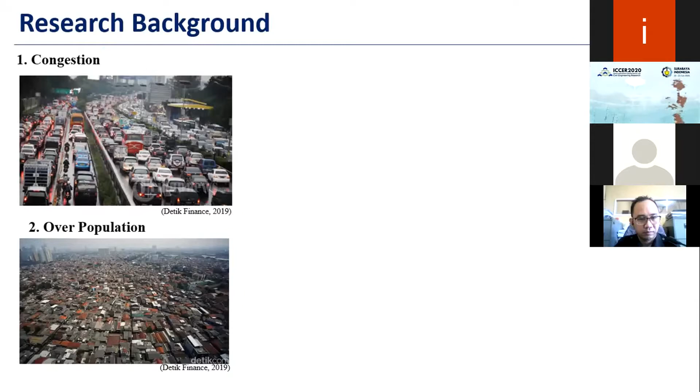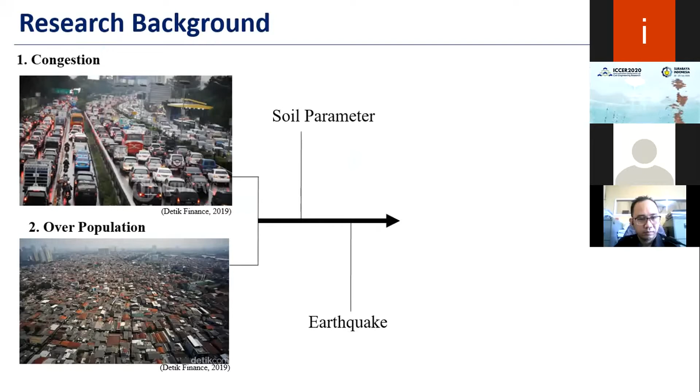First, research background. Jakarta is a large capital city in Indonesia with a population of more than 10 million. Many problems occur there, one of which is congestion from the very large population, so rail-based public transportation is needed to reduce congestion. Taking into account the soil parameters and earthquake load, utilizing the basement by building underground tunnels is a direct solution for reducing congestion in Jakarta. So tunnel infrastructure is the best solution to break down the congestion in Jakarta.

This is my research purposes. First, knowing the tunnel's ability to withstand axial force, bending moment, and oval deformation that work under static conditions. Second, knowing the tunnel's ability to withstand the maximum earthquake load received by the tunnel structure.

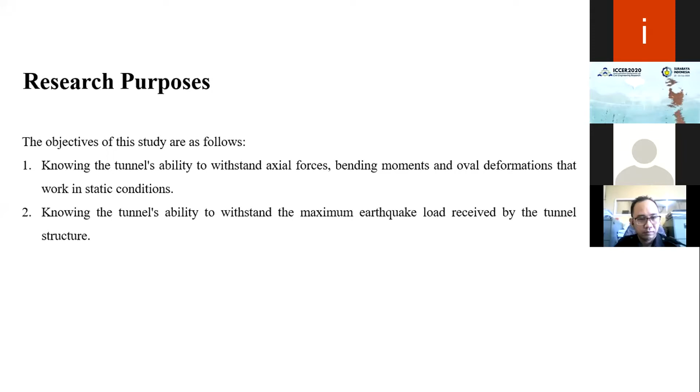Second, why is the Jakarta MRT tunnel circular? There are various kinds of tunnel shapes, one of them being a circle. Considering the soft ground in Jakarta, a circular tunnel is the right choice to reduce stress, because for tunnels that have angles, the stress that occurs will be higher than in a circular tunnel.

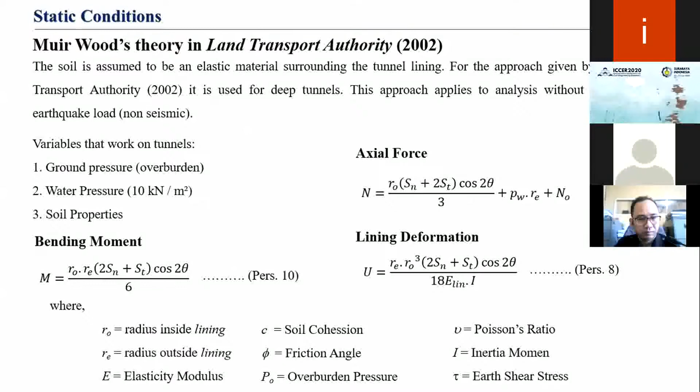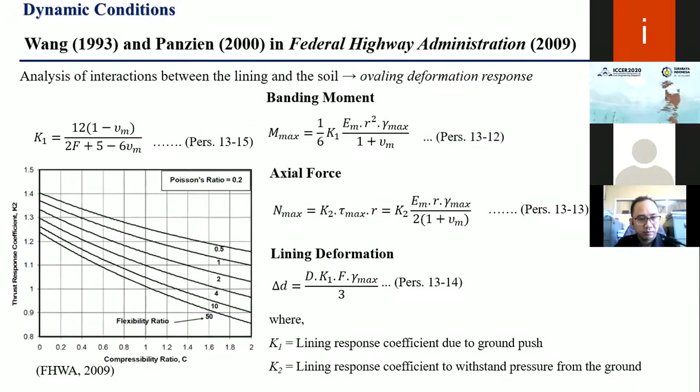For static condition, I use the reference from Muir Wood's theory, considering three variables: overburden, water pressure, and soil properties, which produce bending moment, axial force, and lining deformation. For dynamic condition, I use Wang 1993 and Panzien 2000 from the Federal Highway Administration, which produce the circular lining behavior: bending moment, axial force, and lining deformation.

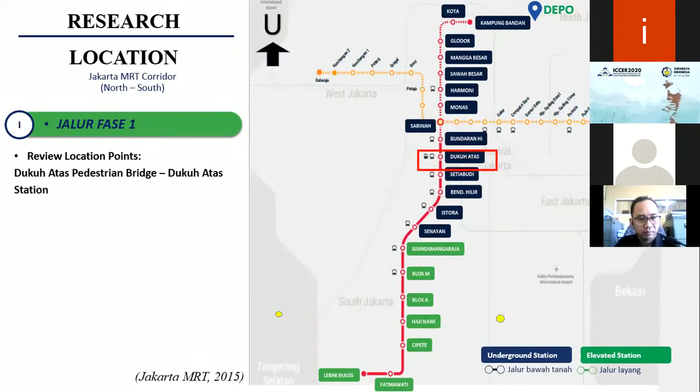Third, research methods. The research location is between Dukuh Atas Pedestrian Bridge and Dukuh Atas Station. The research data I got from secondary data of PT Wijaya Karya and PT MRT Jakarta, and for primary data I took documentation. The data I use is BR21 Borelog data, which is dominated by clay and silt.

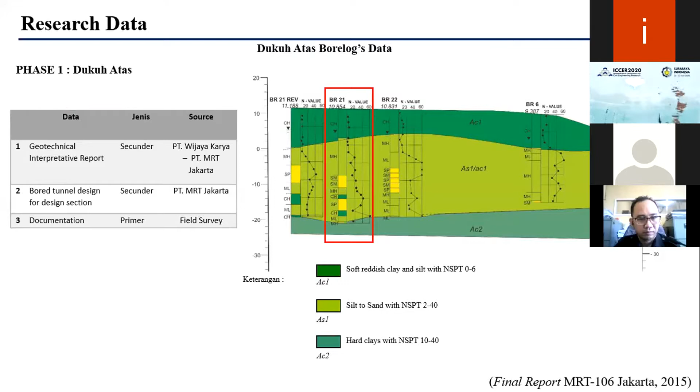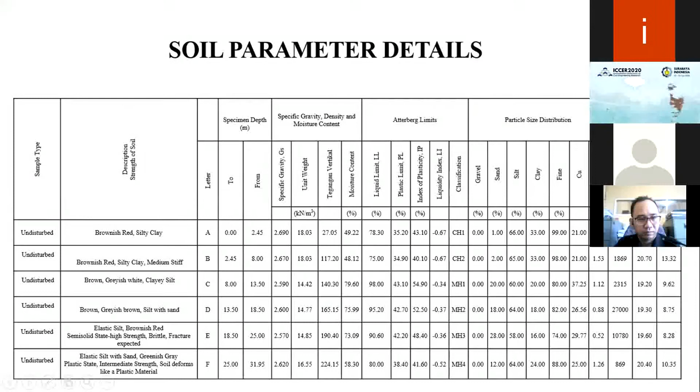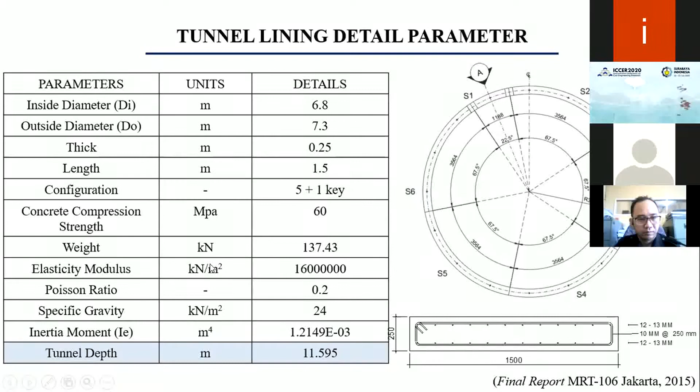This is the tunnel lining detail parameter. We have an outside diameter of 7.3 meters and inside diameter of 6.8 meters, with a grouting thickness of 0.25 meters on the left and right sides, and tunnel depth of 11.5 meters from ground level.

This is the application of earthquake load parameters. I use the South Sumatra earthquake 2007, including the PGA number from the US Geological Survey 2012. The South Sumatra earthquake has a peak ground acceleration of around 36.8 centimeters per second squared and a moment magnitude of 8.4 on the Richter scale.

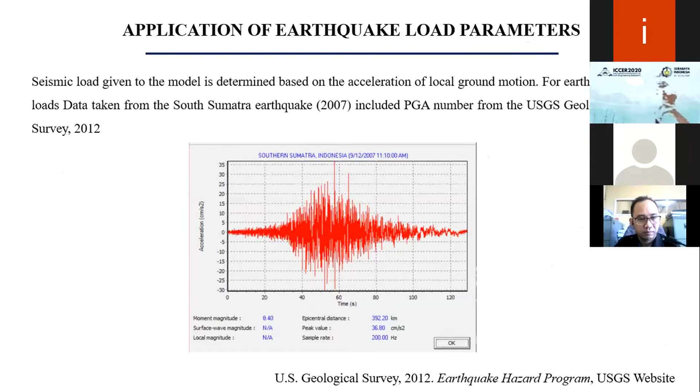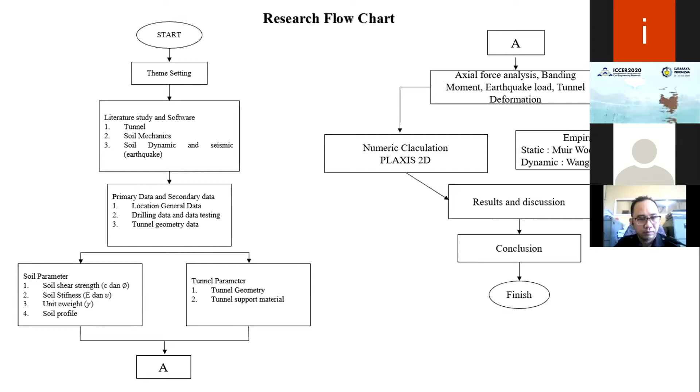This is the research flowchart. Firstly, theme setting, literature study and software, primary data and secondary data, divided into soil parameter and tunnel parameter. Then I calculate axial force analysis, bending moment, earthquake load, tunnel deformation, divided into numerical calculation using Plaxis 2D and empirical calculation using static and dynamic methods, Muir Wood and LTA, and Wang and Penzien 2000.

Result and discussion. This is our empirical method step matrix. Firstly, manual calculation divided into static condition and dynamic condition.

Location, Dukuh Atas pedestrian bridge until Dukuh Atas station.

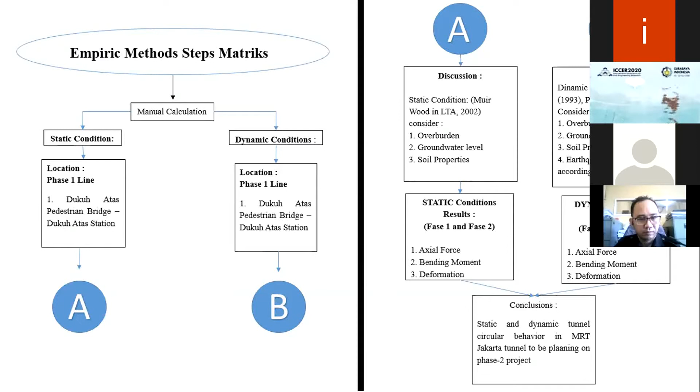The discussion on static condition has considered the overburden, the three variables: overburden, groundwater level, and soil properties. Also in dynamic condition, consider four variables adding the earthquake load PGA according to PGA allocation, which produces the circular lining behavior, that is axial force, bending moment, and deformation.

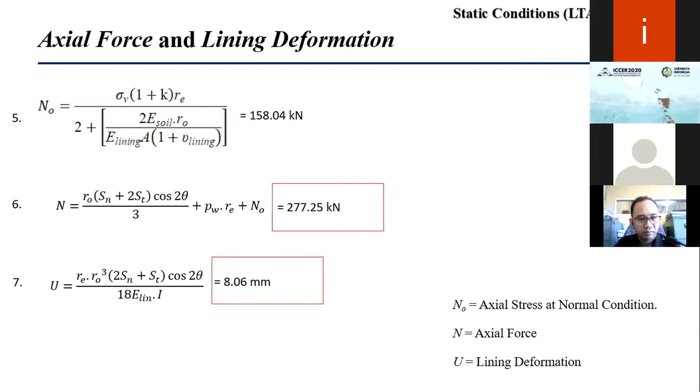The result: this is bending moment based on static condition LTA 2002. We can see the bending moment is equal to 71.39 kN per meter, and axial force and lining deformation shows 8.06 millimeter. That is still in the safety zone of tunnel deformation.

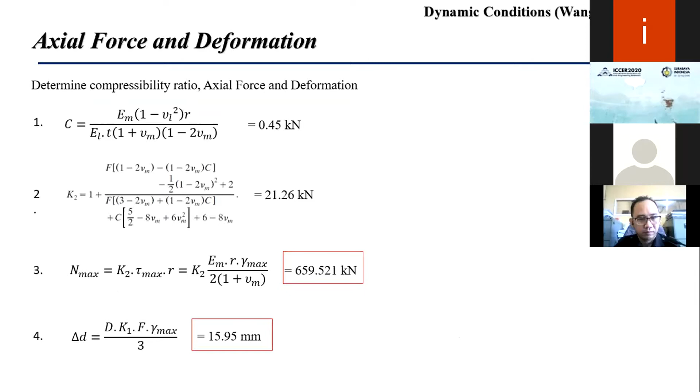And then in the condition based on Wang 1993, we can see the deformation 15.95 millimeter. And then bending moment and deformation based on Penzien 2000 has the same value, and the bending moment is equal to 44.91 kN per meter.

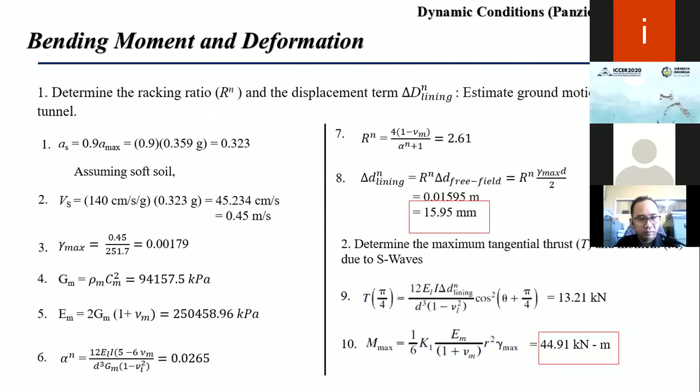I put 3 input stages: first surcharge load, second excavation, and third earthquake load. And this is the static final result.

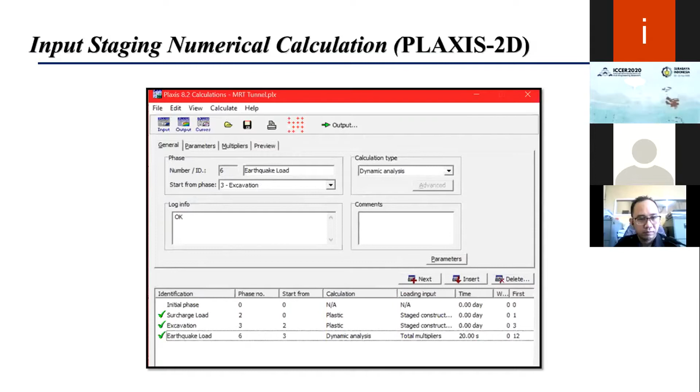We can see the comparison between empiric and numeric. The numeric shown circular lining behavior is bigger than empiric calculation. The lining deformation of empiric calculation equal to 8.06 millimeter, and numeric equal to 15.12 millimeter. That is still in the safety zone lining deformation.

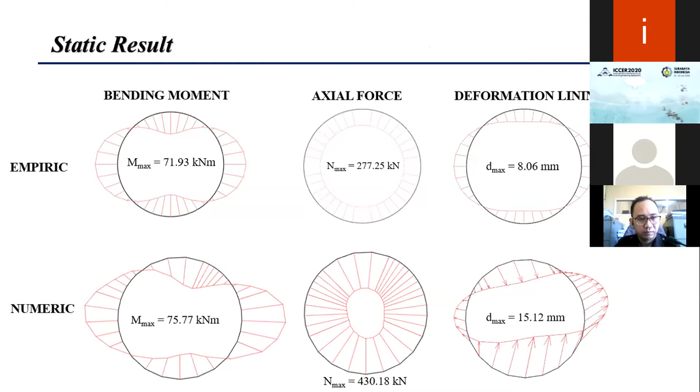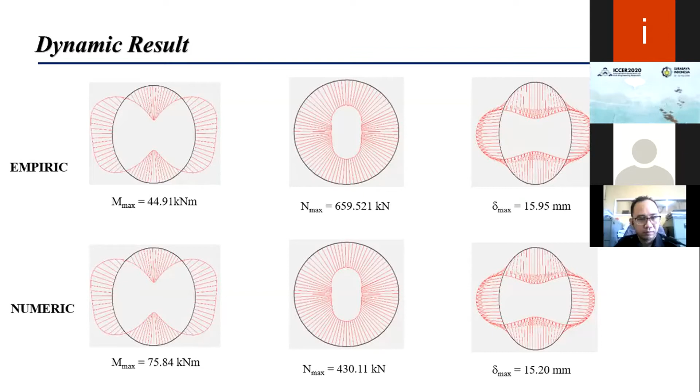The circular lining behavior shows the compression falling for the tunnel. The dynamic tunnel result from empiric and numeric is not different enough. Both deformations show equal to 15 millimeters.

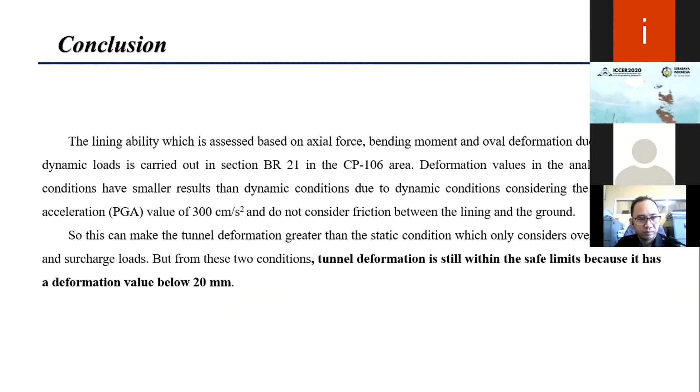This is the conclusion. The lining ability, which is assessed based on axial force, bending moment, and deformation due to static and dynamic load, is carried out in section BR21 in the CP106 area. This can make the tunnel deformation greater than the static condition, which only considers overburden load and surcharge load. But from these two conditions, the important thing is tunnel deformation is still within the safe limit because it has a deformation value below 20 millimeters.

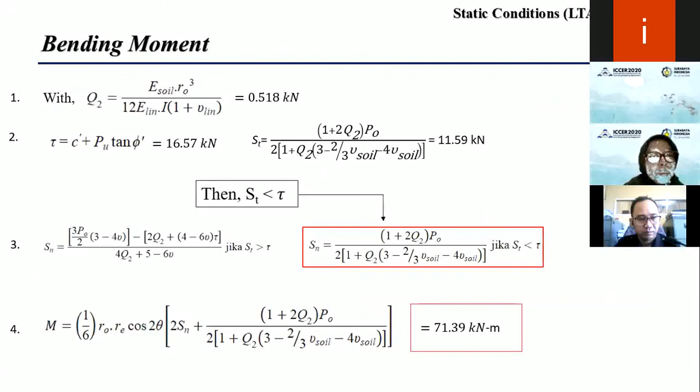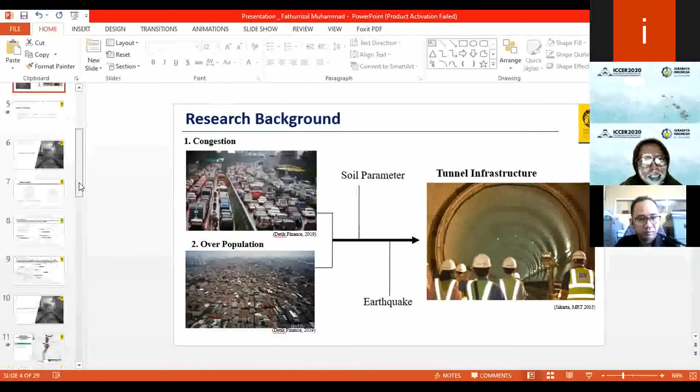Okay, Mr. Fatur, may I ask you something? Can you explain to me, if you calculate with a pseudostatic analysis, is the result the same as your result?

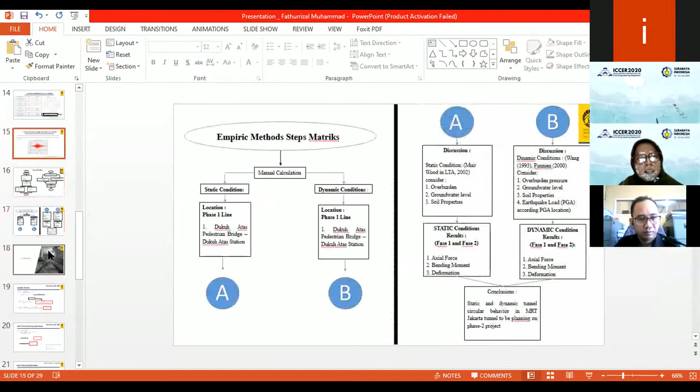Okay, in pseudostatic methods, do you analyze with this method or not? Yes, I analyzed with empirical and numerical methods.

So I used the Muir Wood theory in Land Transport Authority 2002 because circular lining behavior considers the 3 variables of tunnels, that is ground pressure, groundwater pressure, and soil properties. The static condition does not consider the earthquake load, but it considers the full slip condition, that is friction angle and cohesion. But in dynamic condition, it doesn't consider the friction angle, but only considers the earthquake load like PGA number or ground motion.

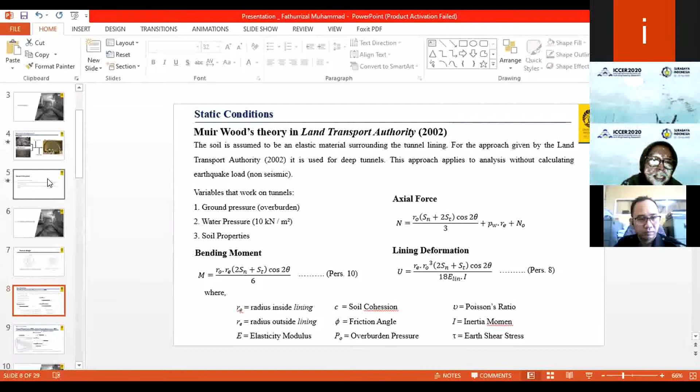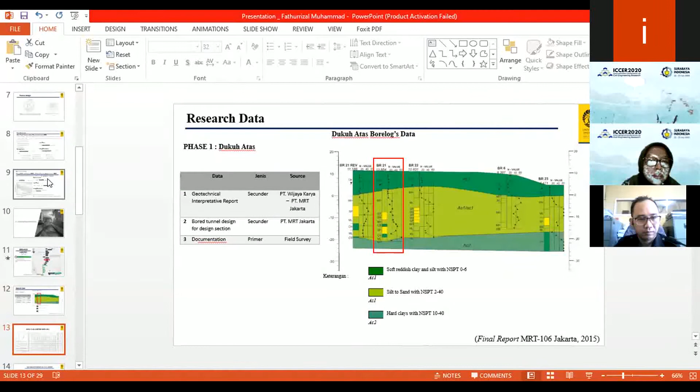Okay, how can we convert to dynamic analysis to calculate pseudostatic in the numeric method? The different thing of static analysis and dynamic analysis in numerical method is the peak ground acceleration. I use the case of the South Sumatra earthquake, that is peak ground acceleration around 300 centimeters per second square. That is the different thing in comparison with the static condition.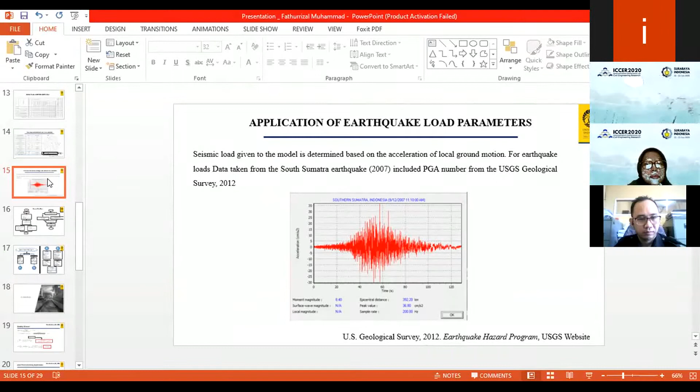So in the input staging like this, we can see the static condition only considers the structure surcharge above the soil and the excavation, the step of the excavation. But the dynamic analysis uses earthquake load, that is total multipliers that have input the acceleration.

Okay, in the Plaxis, you input data of earthquake? Yes, acceleration data. Okay, acceleration data.

Okay, maybe if we're not using Plaxis and we calculate manually, or we don't have Plaxis, can you suggest how we can know the behavior of lining if we don't have earthquake data? I mean for pseudostatic, can you convert? If we don't use dynamic analysis, but we analyze with pseudostatic, is the result the same, maybe displacement or moment or another parameter?

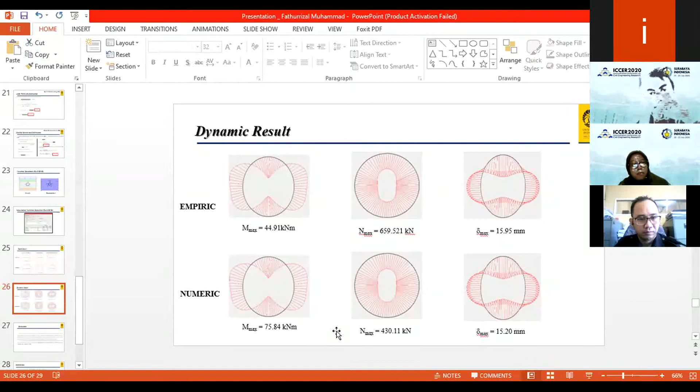Honestly, in dynamic numerical analysis and empirical analysis with Plaxis or not Plaxis, it has input the acceleration data. But the difference, I think, is because the numerical analysis doesn't consider the full slip condition.

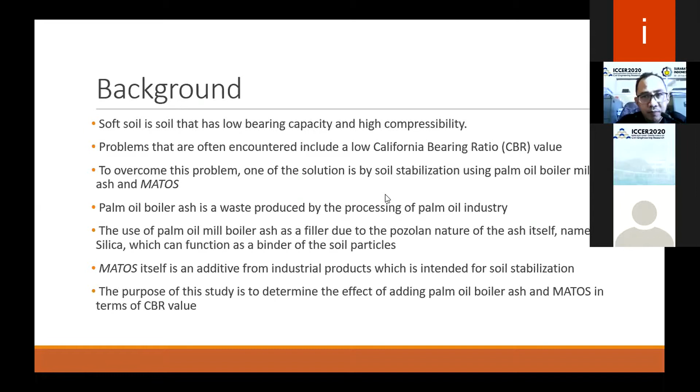Next, the literature review. First, boiler ash is one of the waste materials from the palm oil processing industry, and it is widely available, especially here in Kalimantan, in Pelaihari Tanah Laut, Banjarmasin City. From the XRF analysis, the major component of boiler ash is silica oxide, followed by calcium oxide and ferrum oxide.

Matos is an additive which functions as a solidifier and physical-chemical stabilizer, produced by PT Watukali Capita Ciptama, Yogyakarta. So Matos is the name of a chemical product by PT Watukali, especially intended for soil stabilization. Matos is in the form of a fine powder material, composed of inorganic material, which has no odor, has a pH of 8.37, volume unit weight of 2.35, and water solubility of 1 to 3.

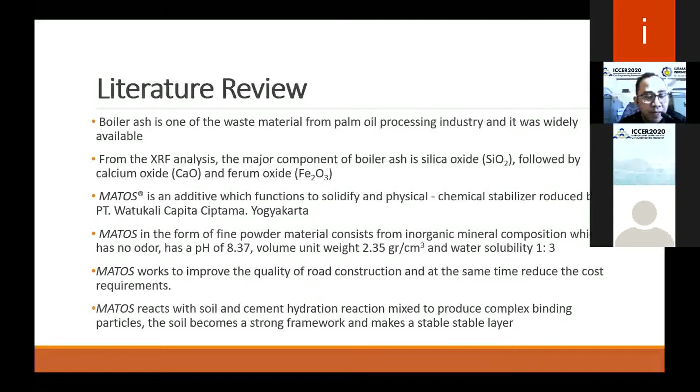Matos works to improve the quality of road construction, especially, and at the same time reduce cost requirements. Matos reacts with soil and cement in a hydration reaction to produce complex binding particles. The soil becomes a strong framework and forms a stable layer.

The application of Matos is very simple. First, the soil is mixed with Matos, then dredged and stirred until it reaches a homogeneous condition. Water is added to the mixture according to the calculation to achieve the OMC. So in order for Matos to work maximally, the soil needs to be in the optimum moisture content condition.

Within the first 24 hours, the reaction of Matos with soil has taken place, and within the first 7 days, most chemical reactions have been completed. But because of the nature of Matos itself, the chemical reaction will continue for a period of a year. In terms of soil stabilization, Anwar Muda already conducted a study on increasing the unconfined compression strength of clay soil after adding Matos, stabilizing sand and cement.

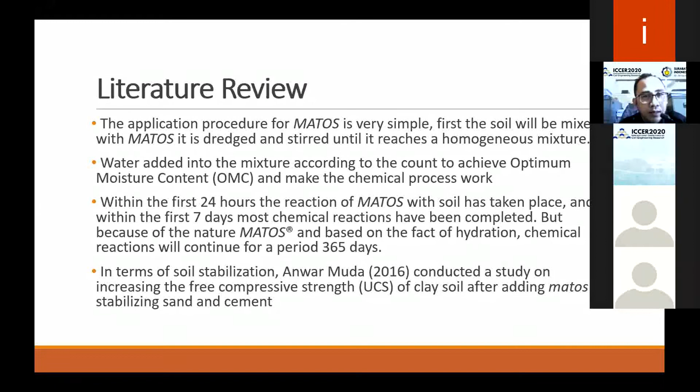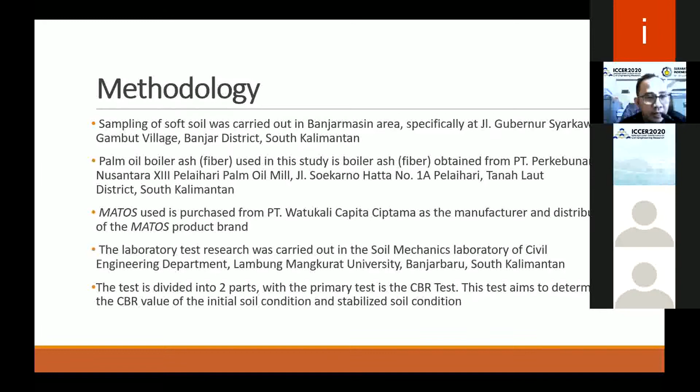For the methodology of this research, the soil sample was taken from the Banjarmasin area at Gubernur Syarkawi, Gambut. The palm oil boiler ash, or fiber, was obtained from PT Perkebunan Nusantara 13, Pelaihari Palm Oil Mill. The Pelaihari Tanah Laut ash is just a filler, so mostly the focus is on Matos itself. This is our first research using Matos, so I'm sorry, we are still investigating what caused this. Thank you, I hope it's enough.

Question? Okay. Explanation. Okay, please, Christian. Christian, unmute. Okay, Christian, please. Can you hear my voice then? Yes. Okay, great. Thank you.

So I saw from your presentation that you mainly focused on the CBR test to measure the bearing capacity because of the addition of several products, let's say. And what do you think of the... I mean, perhaps we can expand more, because there are some anomalies as already highlighted by the other presenter, let's say. Okay, thank you.

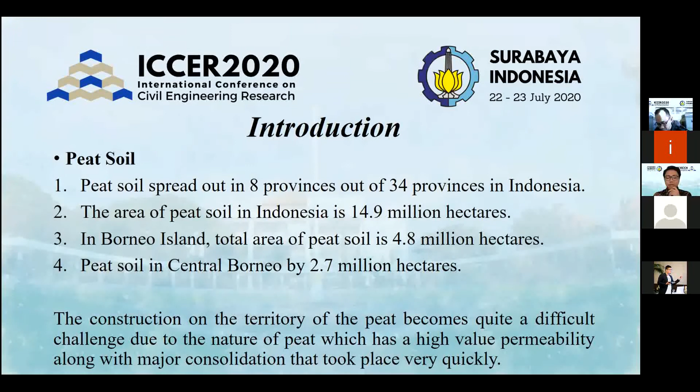As we all know, construction on peat territory becomes quite a difficult challenge due to the nature of peat, which has a high permeability, along with major consolidation that takes place very quickly. Next, I will describe skirt footings. Skirt footings are known to increase the bearing capacity of foundations on soil that has low bearing capacity.

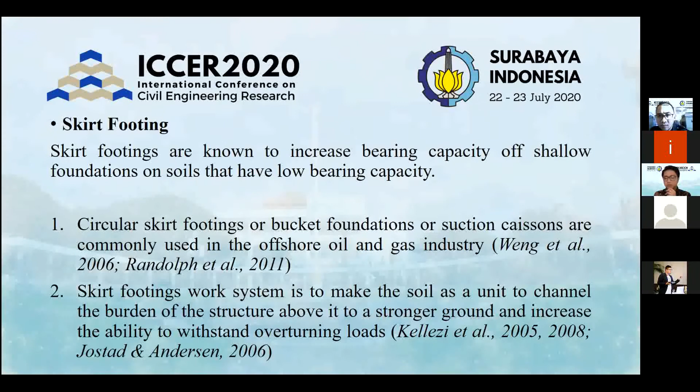According to Weng et al. 2006 and then continued by Randolph et al. 2011, circular footings or bucket footings or suction caissons are commonly used in the offshore oil and gas industry. While according to Kellezi et al. 2005 and 2008, and then continued by Jostad and Andersen in 2006, the skirt footing work system is to make the soil a unit to channel the burden of the structure above it to stronger ground and increase the ability to withstand overturning loads.

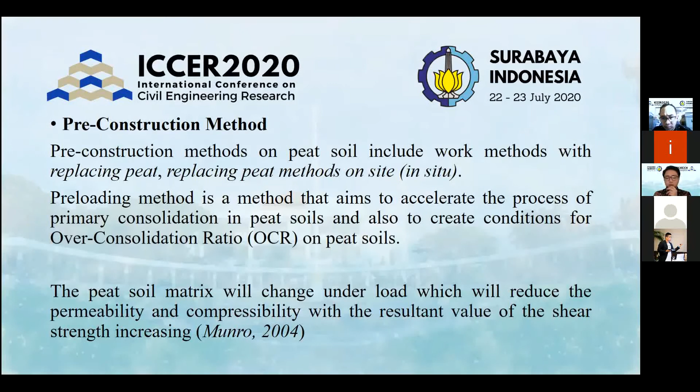I'm going to explain a little bit about pre-construction methods on peat soils. Normally, there are some pre-construction methods, such as replacing peat, or replacing peat on site, which we call in situ. There's a method called preloading that is usually used as a pre-construction method, which aims to accelerate the process of primary consolidation on peat soils. According to Munro 2004, the peat soil matrix will change under load, which will reduce the permeability and compressibility, with the resultant shear strength increasing.

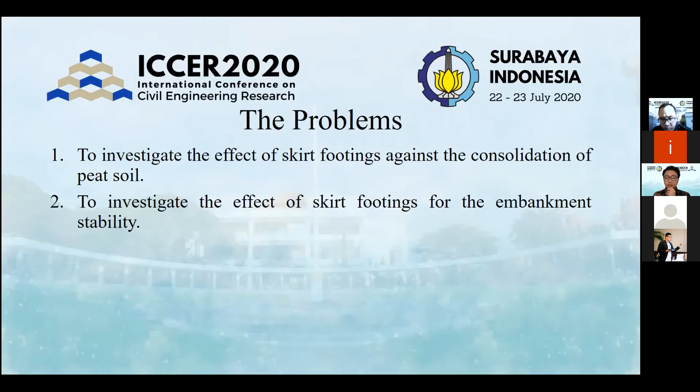Because of that introduction, I will divide the problems into 2 parts. First, to investigate the effect of skirt footings on the consolidation of the peat soil, and second, to investigate the effect of skirt footings on embankment stability. Here are my methods. I conducted my research with the help of the software Plaxis. The material properties come from the drill log and soil data from the Bukit Rawi area.

Actually, there are 3 dominant layers from the drill log. First is the sand layer with a depth of 0 until 2 meters, and second the peat layer with a depth of 2 meters until 10 meters. Third is the deep sand layer with a depth of 10 meters until 18 meters.

In the modeling in Plaxis, I use 2-dimension Plaxis. Second, I use axisymmetric modeling to find out the behavior of skirt footings under embankment pressure. And third, I use static load as a replacement of the embankment load on the soil. To help stabilize it better, the 1 meter of soil under the embankment is raised in OCR value.

7, there are 16 variations of skirt footings used in Plaxis: the variation of diameters and the variation of length. And 8, as the comparison of skirt footings, I will use the mini pile and unskirted footings as a comparison for the resulting footings and try to investigate the differences. 9, the space between shallow foundations is 1 meter.

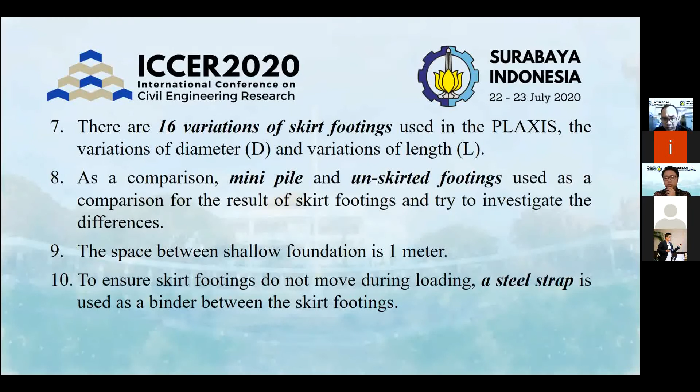And 10, to ensure skirt footings do not move during loading, a steel strap is used as a binder between skirt footings. In the Plaxis step calculation, I use the same steps for all 3 types of shallow footings. First, I will investigate the consolidation of 5 days, and second, the consolidation of 365 days to see the behavior of the embankment in a year. Third, I will calculate the consolidation to minimum pore pressure, and the last is the stability value of the embankment.

The third chapter is the result and discussion. Before we know the effect of skirt footings for the embankment itself, the test of the original soil model for the embankment. As the result, the deformation at 5 days is 137 millimeters. 169 millimeters with a stability value of 1.372.

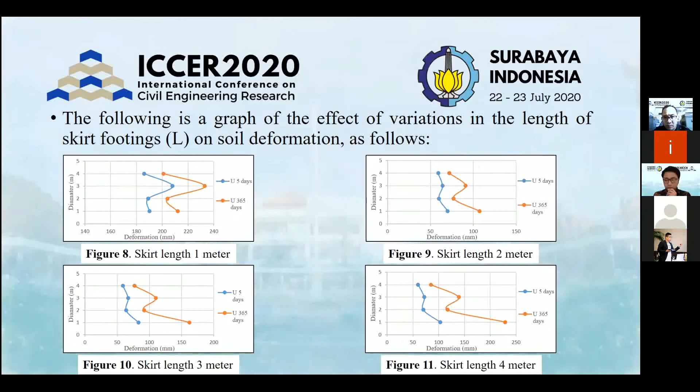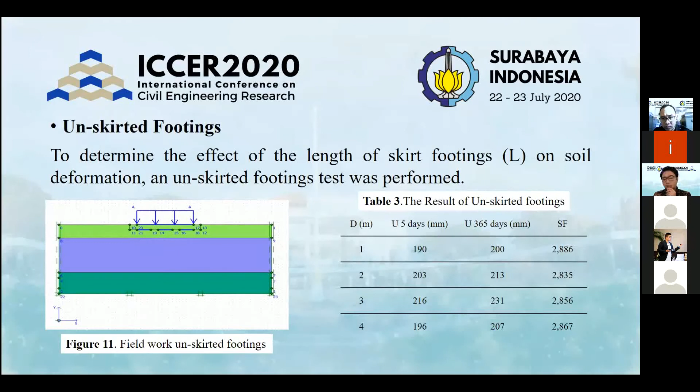Here's the result of unskirted footings. I want to know the effect of length in the skirt footing, so I investigated unskirted footings, and the result is quite interesting. This is the graph to show the difference between skirt footings and unskirted footings from figure 12 until figure 13. In figure 12, the deformation at 365 days shows that the deformation in unskirted footings is bigger than in skirt footings. But the interesting part is at the 1 meter diameter skirt footings, the deformation is much bigger than the unskirted footings.

Figure 14 until figure 15 shows the effective stress that happened in both types of shallow foundation. As you know, the effective stress is commonly used as a signal for deformation. As we can see, the effective stress from the skirt footing is quite small against the effective stress from unskirted footings.

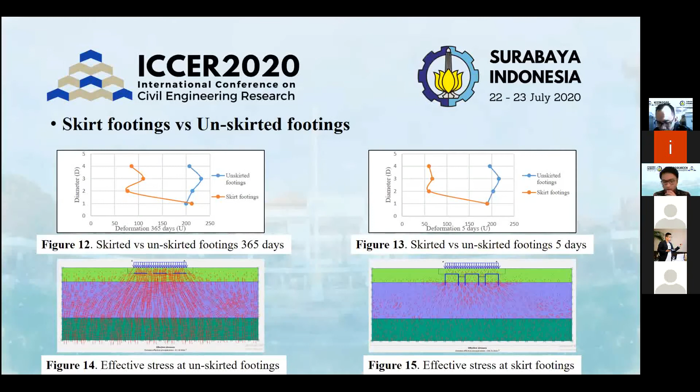I use minipile as a comparison because the public works department has a guideline, soil improvement of peat soil for road embankment construction, number PB T-11-2005-B, using stabilization cement and wooden pile. To compare the skirt footings method with the wooden pile and cement methods, the wooden piling was replaced with minipile to adjust to the current field condition, and the cement was replaced by an increased over-consolidation ratio of the original soil.

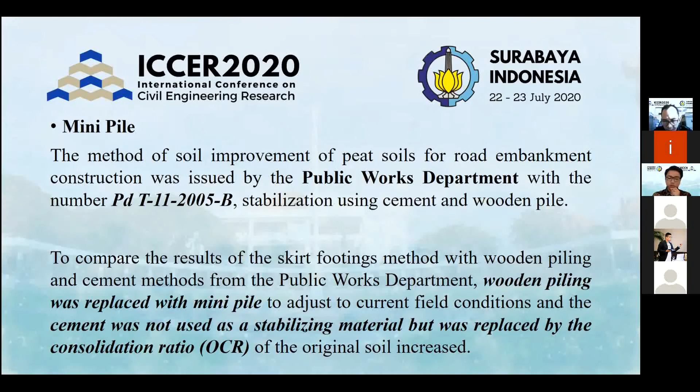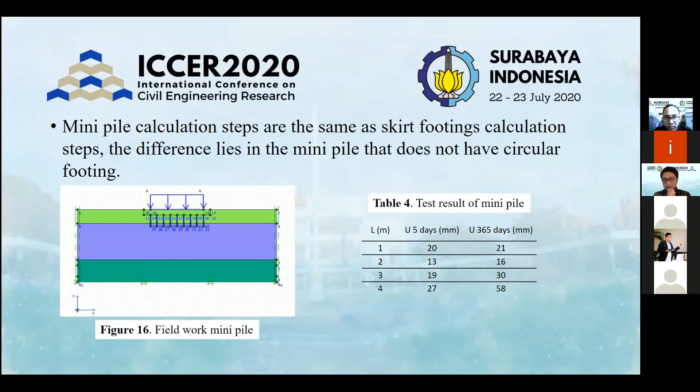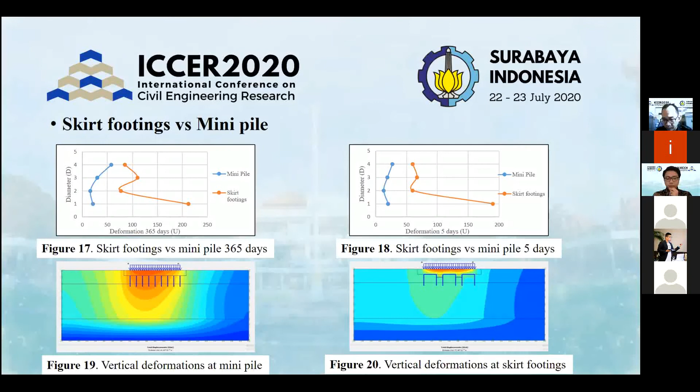For the conclusion, the main focus of this research is to investigate the effects of skirt footings on differential settlement and stability, and the results show the embankment stability goes up with the help of skirt footings. The function of the skirt wall under the footings is to hold the load from the embankment and distribute it evenly to the soil around the skirt. It shows the comparison between skirt and unskirted footings.

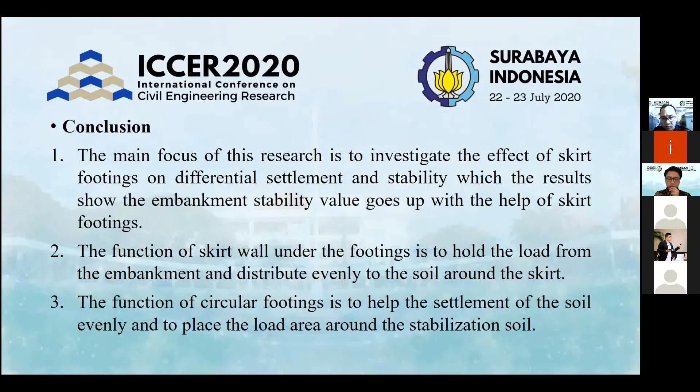And third, the function of circular footings is to help the settlement of the soil happen evenly and to place the load area around the stabilized soil. This happens where the minipile and skirt footings are compared. I think that's all. Thank you.

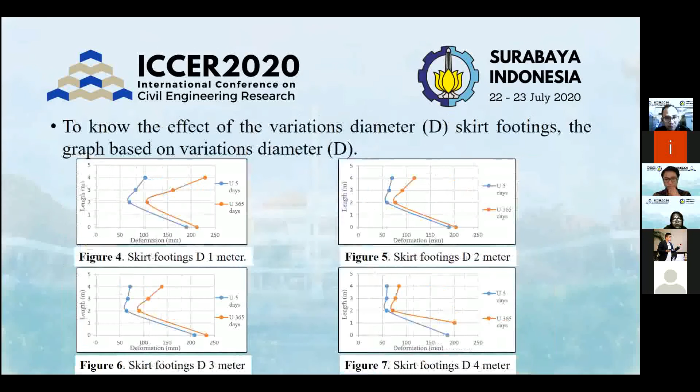Okay, the question: I think it's a good idea, that kind of skirt footing. My question is, is there any specific, what is that, the slope of the skirt and the depth of the skirt? Is there any definition like that? That's all. Thank you. Okay. Please, Mr. Danar. Okay, thank you for the question.

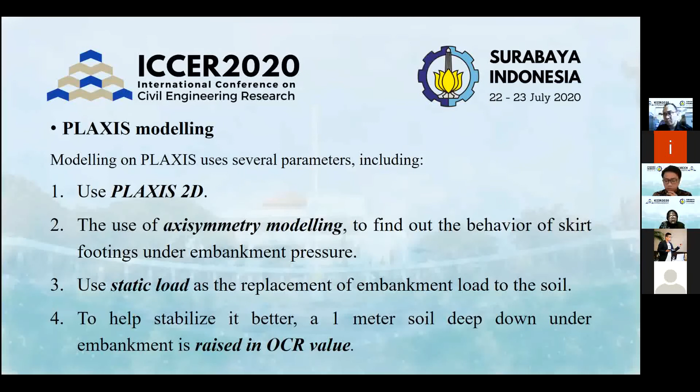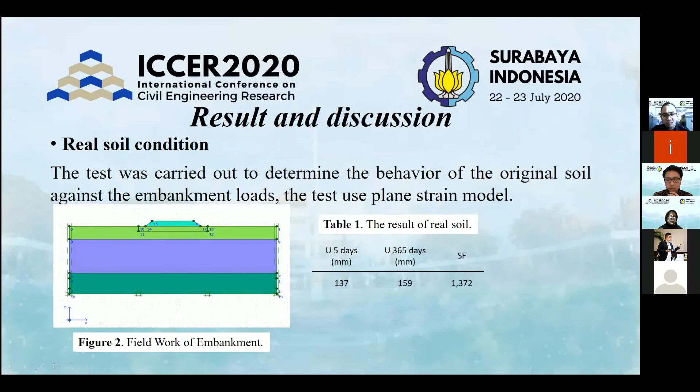In the Plaxis modeling, actually there are plenty of things that I would like to describe, but because of the limited time, I will try to minimize it. I hope it helps. In the Plaxis modeling, number 4 says that to help stabilize it better, the 1 meter of soil deep under the embankment is raised in OCR value. As we can see in figure 2, here the stabilized soil is located, and the skirt footing is directly above the stabilized soil.

For the slope of the skirt footings, in my opinion, it is a 0 degree slope. So it's like vertical or something like that? Doesn't move. I try to strap it with steel strap. Thank you.

Bu Nur. It's clear enough, Bu Nur. Sorry, there is a problem again with my Zoom, so it just disconnected suddenly.

So it means that there is no slope for the skirt, just vertical. Yes, just like that. Just vertical. In my opinion, if you name it skirt, it means that there is a slope or something like that. It's not like that, right? So it's vertical. So why do you call it skirt?

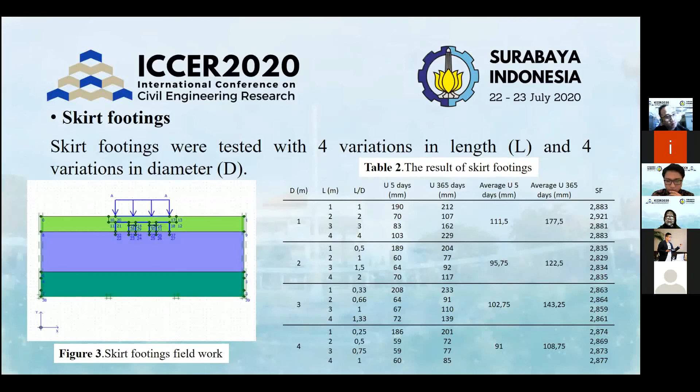Why I call it skirt? Actually, I got two different names for it. The first is confined footings, but in research overseas a lot of researchers call it skirt, as it confines the soil below it, just like a bucket turned upside down. I don't design it with any angle on the skirt to avoid the possibility of cracking from the soil pressure.

Yeah, I'm sorry. You fill it with the soil? Inside the skirt, there's a hole that will be filled with soil. Oh, okay. Okay, thank you. Thank you.